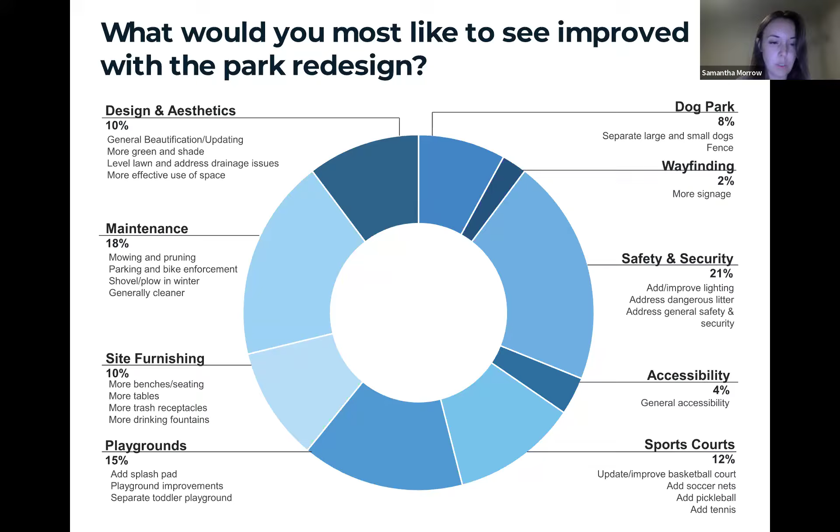We wanted to include a couple survey responses that people included that we thought were nice in the last round of surveys: 'Fidelis Way Park is a beautiful hidden gem that is underutilized.' Someone commented that the large grassy area on the playground side would be used more if it were flat. Some people wanted a safe, fun playground that toddlers can have fun in, and sprinklers or something you can get wet in.

To summarize those findings, we wanted to include this slide since it's a lot of information at once. What we found was that Fidelis Way Park seems to be a part of people's routines - people are visiting daily throughout the day. They use it to move through the neighborhood, to play at the playground, to exercise, or just sit on a bench. There was a lot of interest, and people tend to value the playground and sport courts and recognize room for improvement in both.

As you could see from those surveys, people are strongly prioritizing improvements to site furnishings and safety. There was also a lot of interest in adding a cooling feature like a splash pad or even a shade structure.

Taking that information as well as aligning with Boston Parks and the City of Boston goals, we developed these three concepts. Before I jump into the concepts, I wanted to orient everyone again into plan view - this was our existing conditions map that we showed at the community one meeting.

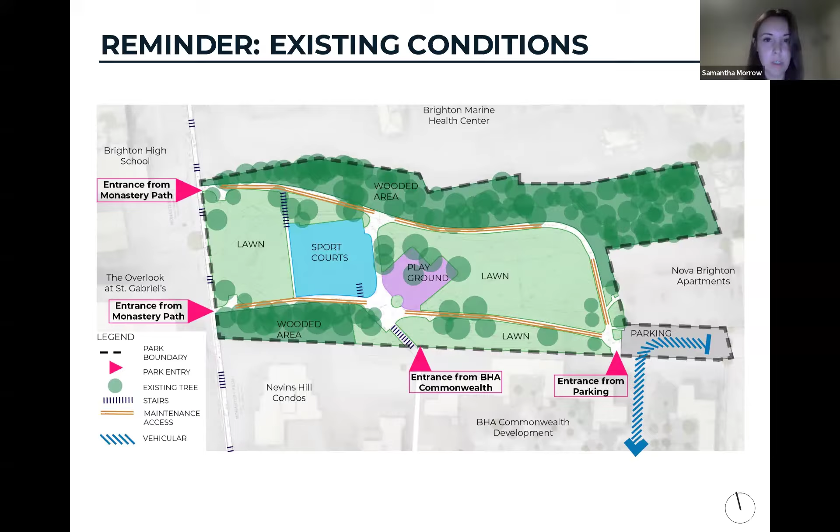So concept one, the main things we are looking at improving are the playground, including a dog amenity area, and then new plaza areas with some shade structures.

I'll start page south. We have this new accessible ramp coming from Pamela Donovan Road. The ramp would switch back, as my cursor is showing, along the slope here and then lead into the park.

Adjacent to that would be just a new set of stairs leading to Monastery Path, so that would be a new accessible connection into the park here. We would tie into existing pathways and then are proposing, in this light green area, a dog amenity space.

The existing basketball courts would remain with minor improvements as needed, such as some of the chain link fencing around there and then the hoops and nets.

Moving along the page, in this concept we removed that central pathway that was previously between the playground and the basketball court, mostly because it wasn't accessible, but it also allows us to expand these two plaza areas and recoup some of the grade that happens there.

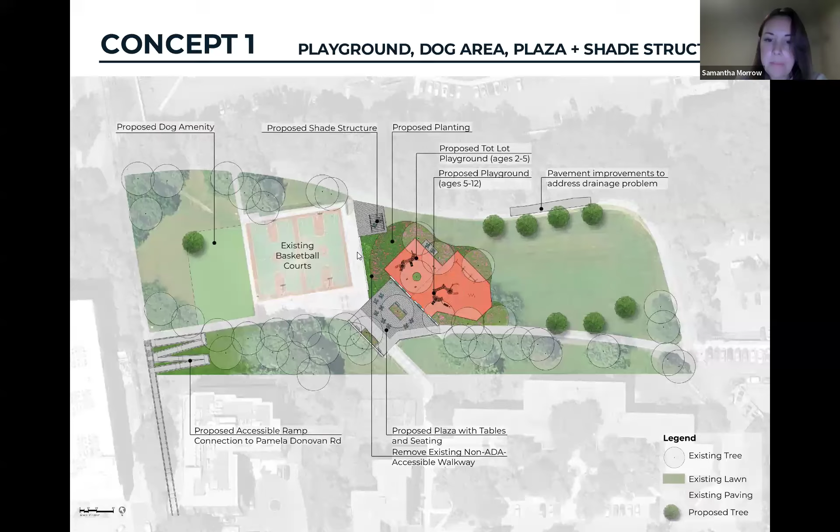We also have some precedent imagery for concept one, just showing some ideas for what that shade structure can look like. Obviously, from being on site, you can see there's a lot of grade we're working with, so we're hoping within the play area to use some of those mounds and grading to our advantage, and perhaps we can have some sort of embankment play with a slide or climbers.

This is just an image showing if you wanted to lean into the existing tree canopy, there's play equipment that's tree themed. And then an image down here showing a potential dog amenity with accessible path and fencing.

So that's the main takeaways for concept one: a dog amenity, playground, and then those plaza gathering areas with shade structures.

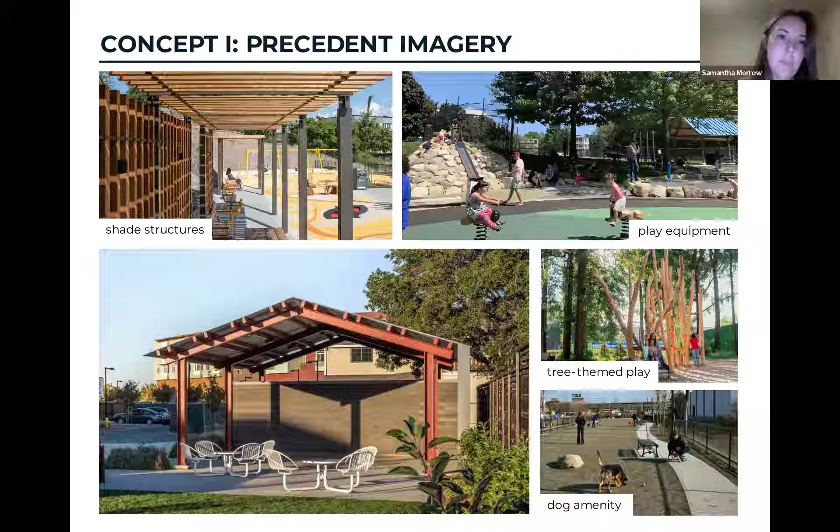The next concept's main amenities, based on feedback, were updates to the playground, updates to the sport court area, and including some terrace seating at the basketball court area.

Again, page south, we have that accessible ramping connection from Pamela Donovan Road tying into the existing pathway, which we will be realigning starting from the basketball court to allow for that embankment seating.

So not only will the embankment seating improve what's there, which are those very steep granite cobbles that present a fall hazard, it would provide more seating for the court. We would then propose keeping one of the basketball courts, but improving the other one to be a multi-purpose sport court.

So it could have lines for tennis and pickleball, or soccer lines. And since a lot of people talked about coming to the park to exercise, we would stripe and paint a little walking track around it.

The other item this concept includes is a new accessible ramp between the playground and the basketball court. Using that terraced embankment seating, we're able to create a ramp for an accessible connection between the top plaza area and getting down to the court.

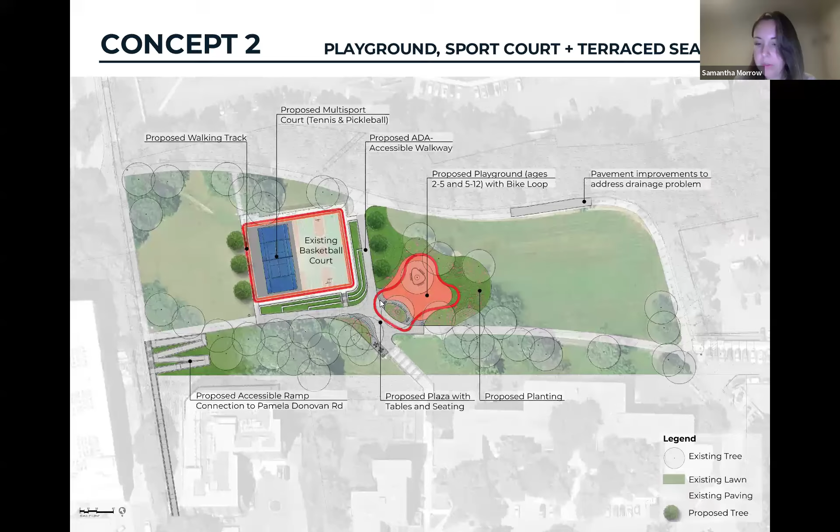So going into some precedent imagery for concept two, we wanted to show what the brightly painted court area can look like, including track lines, or a more interpretive version with large dots and circles for people to walk around, plus some images of terraced embankment seating at the court.

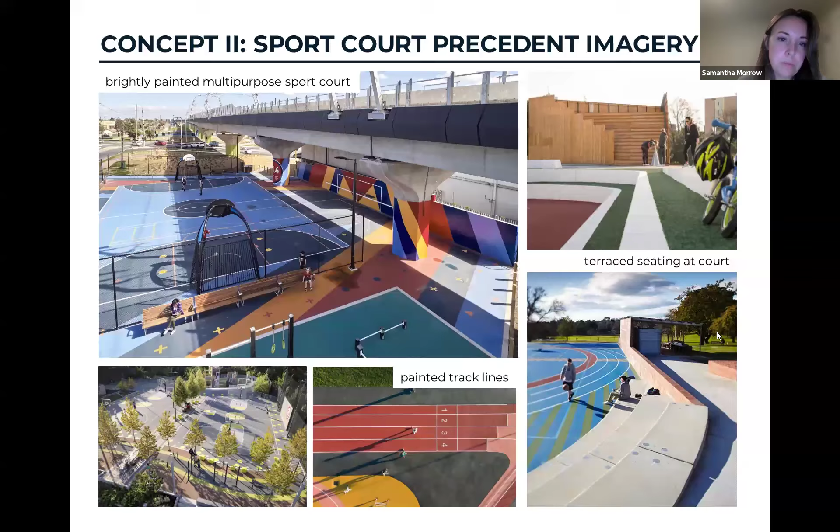For the playground precedent imagery in concept two, showing an idea for a 5 to 12 tower, and an image of 2 to 5 toddler imaginative play. Again, leaning into the existing grades we have to work with, showing some embankment slides. These two images on the right show what that bike loop could look like.

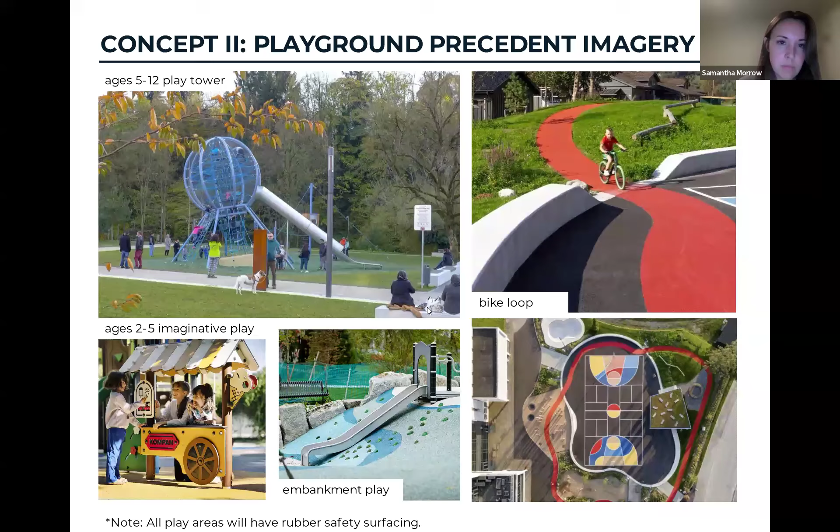So concept three, the main components would be that spray pad area and improvements to the playground. Starting at the south, we have the ADA accessible ramp tying into existing walkways.

We wouldn't be touching the basketball courts again in this one, and instead the focus would be on updating the plaza area with new paving, new seating, and maintaining existing trees.

In blue here, we have the little spray pad area, which we're showing in-ground features for, which would be surrounded by the no-spray zone, as well as some seating for parents.

To where my cursor is here, having a little toddler area and embankment slide. Again, maintaining existing trees around the playground, and then having a larger kid area, which would have more embankment play here.

An accessible connection to the top of that embankment from the path up here, and then another little seating plaza area at the base of the slide for people to either overlook the lawn or watch their kids while they're playing at the embankment area.

And like the other concepts, this also addresses any sort of drainage issues with some new paving where it's needed.

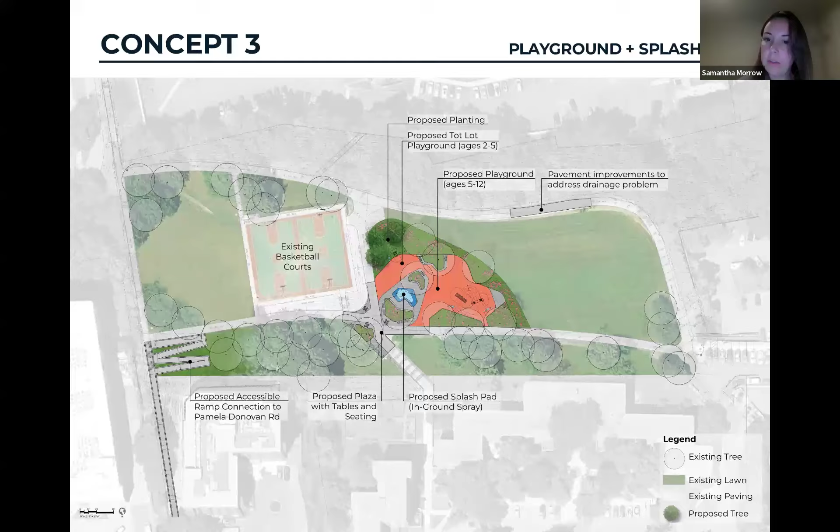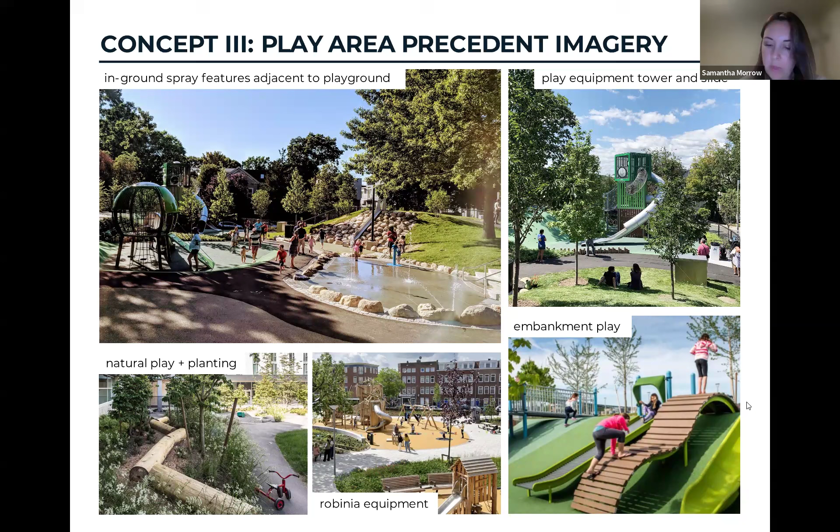So going through all that, we just want to reiterate that all of those concepts are going to include that ADA access ramp from Pamela Donovan Road. We will address lighting improvements as needed, making sure the park is well lit.

We're going to try to do as much as possible to preserve existing trees, and do planting and seeding as needed within the park. All of them include furnishing updates, since that was a large survey response, play equipment updates, and any pavement improvements needed to address drainage patterns and regrading to capture stormwater and address those drainage concerns. So those are included within every single concept.

In concept two, we have the sport court improvements, including a multi-purpose sport court, walking track, embankment seating. We're showing a new accessible path here, and I forgot to mention, we're removing that path since it's currently not accessible. Again, some plaza updates, but a little smaller than the plaza updates we're showing in concept one.

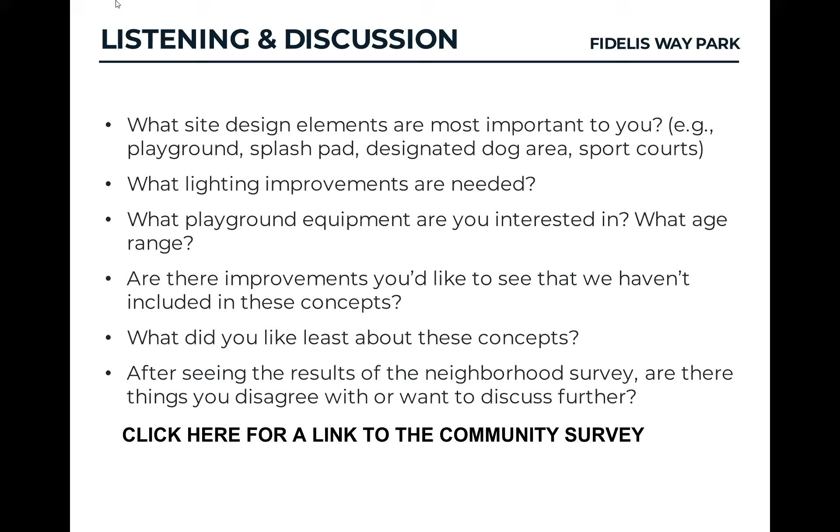Thank you, Jack. Yes, I do know maintenance is a continued issue. Typically, as far as I'm aware, we do not plow most interior paths inside parks.

Let's see, Filippo, you have your hand up. Let's see if I can call on you.

Muted, sorry. Can I hear? Oh, am I hearable now? Okay, sorry guys, I was talking by myself I guess. So I'm one of the residents. Hi everyone, I'm one of the residents of 1 Evans Hill.

And so I see that there is pretty substantial transformation of the path that is on the left of the building. And I was wondering if there is going to be a lot of movement of ground around the area and a lot of heavy equipment, and how the city is planning to make sure that there is not going to be any damage or any issue to surrounding structures, in particular our building.

Thank you, Filippo. My understanding is that yes, this will require a significant amount of earthwork. The idea is to create an accessible path from the top of the road there down into the park to make an accessible loop that connects from that side over to the parking lot on the east.